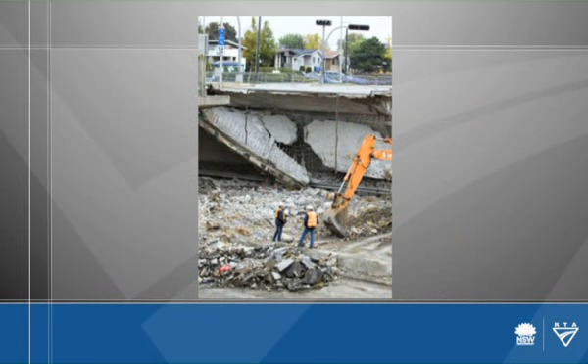Exactly. And in the whole process, say, of construction, if any one part of the process is not right, one of those can bring you unstuck in terms of durability and, as you say, even structural integrity. And we can certainly look at an example from Quebec, where due to a number of issues, including low-quality concrete, reinforcement placed in the wrong place, over a period of time this structure had an inbuilt deficiency which led to a complete catastrophic failure and in fact loss of life of people on the freeway below.

But it really highlights that any one part of the process can bring the thing unstuck. So everyone is responsible. Early on, all the way through, everyone's got to make sure they tie their laces properly. Exactly. So in this episode, we're looking at the 5 C's of concrete construction. Yes, Peter, a very important concept.

And there's a saying that says, good concrete is made from cement, fine and coarse aggregate and water, but sadly, so is bad concrete. The important thing is, it's the process that makes the difference. And talking of good concrete, it's all about achieving durability. Exactly. So these are the 5 C's. First, a quick overview, then we'll go into more detail.

Our first C, concrete mix design. In this subject, we're looking at testing materials, testing the concrete mix, so we get the concrete that we're after. Concrete production. That's related to the actual batching of the concrete, transporting it to the site, and getting it into the job. Okay, the third C is cover and content.

Yes, cover and content for reo and strand, because it's the cover that makes the difference. 5 mil of cover could add 15 years of life to the structure. So on to the fourth C, which is all about compaction, and this is to do with the pour, isn't it, Don? And I would probably say this is one of the most important aspects, compaction. So what we're after is getting the density of the concrete so we get a durable, strong concrete in the structure. On to the fifth C, which is curing.

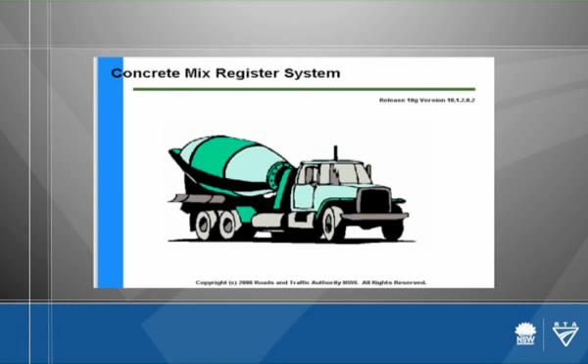So in detail now, our first C is concrete mix design. Don? Certainly very important. What would normally happen is that the RTA holds a register of all approved concrete mixes. So the contractor, if possible, will probably go for one of those. But if he doesn't, then he's going to have to go through the process of preparing a new trial mix, doing all the testing to make sure that it complies. And also he has to make sure that it's suitable for the application to which he's putting it.

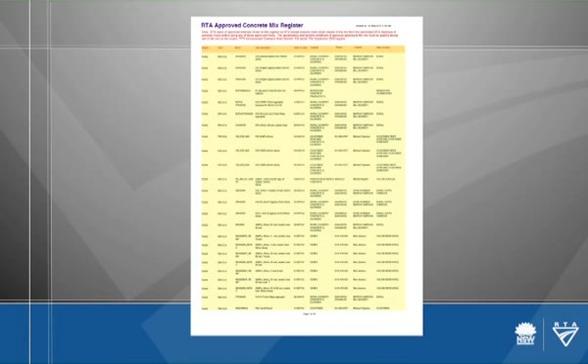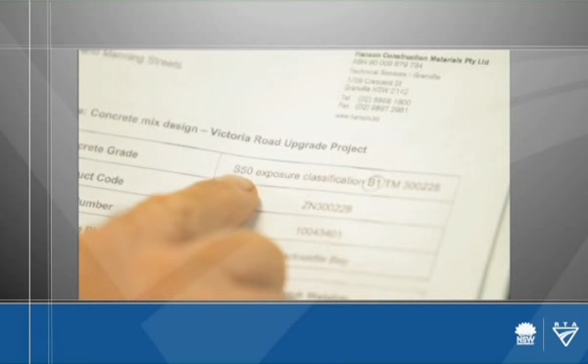Well, how do you make sure that it is suitable? Well, on the drawings, there's a classification given to tell the contractor what the exposure conditions of the bridge will be, and that will automatically funnel him into a particular type of mix design to suit those conditions. He'll also need to know what the water-cement ratio is in the concrete, what the 28-day strength is, how the concrete's going to be placed, whether it's going to be pumped, whether it's going to be put in with a kibble.

So all these need to be assessed, and how he's going to cure the concrete. So the water-cement ratio, this sounds important, Don. What is it? Absolutely. So what the water-cement ratio is doing is defining the ratio by mass of water to the cement in the concrete. And ideally for high-strength concrete, we want low water-cement ratio, because the lower the water-cement ratio, the higher the strength. And that's why, we'll talk about later, if you start adding water to the concrete, you're changing the water-cement ratio, you're reducing the strength and you're reducing the durability.

Now, Don, let me throw this at you. What if someone specified a mix, a ratio, that wasn't on the register? What would happen? If the contractor wants to use a mix that isn't on the register, he is then forced into going through the whole procedure of getting a trial mix approved, and that will involve testing the materials, all the cement, aggregates, etc., have to be all tested. He has to submit all this through a laboratory, but the thing that he has to allow for is that this process can take about 8 weeks for a new mix to be approved.

But in terms of water-cement ratio, you can only vary that by 3%. So again, the contractor will weigh this up and say, no, this mix isn't going to suit me, I'm going to go and prepare a new mix because of a number of factors. Now, the constituents of concrete can all have an impact on the final product. Let's go through some of the issues that can cause problems.

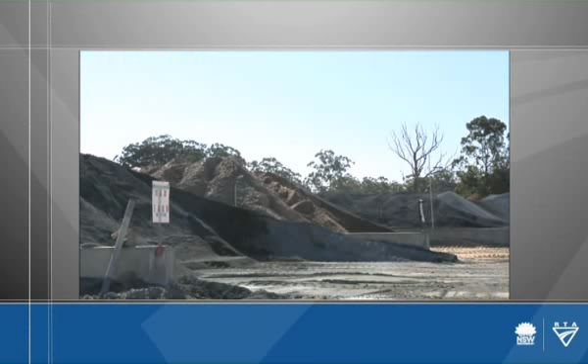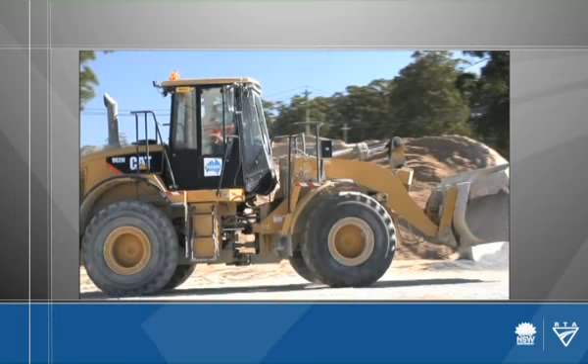Yes, Peter, and one in particular that's worth mentioning, I think, is manufactured sands. Because of the lack of availability of some fine aggregates, crushed rock is now being used as a fine aggregate. The only problem with that material is that it has the potential to absorb moisture. So what happens is the concrete can be batched, be on site, and then absorption will occur. The water will take up into the fine aggregate.

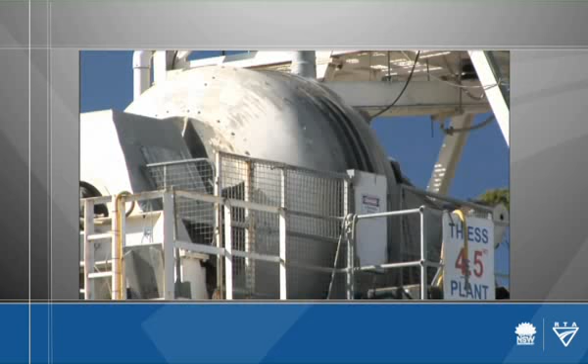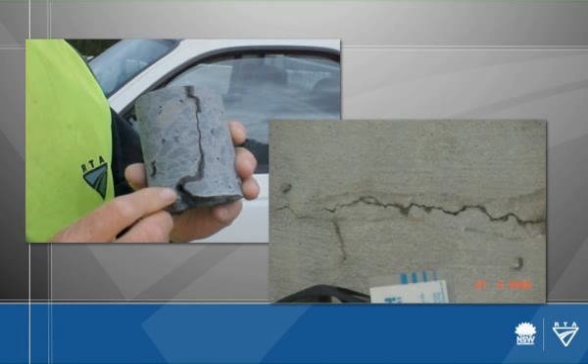The concrete will lose workability, become very difficult to compact. And what it led to, in some instances, very severe cracking of a deck where the deck had to be removed because of the problem. So the manufactured sands have to be controlled, but the specification now requires that the absorption of the fine aggregate can only be 2.5% of the water.

Now, Don, supplementary cementitious materials. That's a mouthful, isn't it? What we're talking about here are materials that are added as a supplement to the cement because we may want to control certain aspects of the concrete behaviour. So these supplementary cementitious materials will consist of fly ash, silica fume and other types of materials. The good part is that these are recycled materials, and so we're using a waste product for the benefit of the concrete as well as using it environmentally sound.

It's another language, isn't it, Don? It is, but you're doing well.

Now, AAR, Don, this sounds interesting. Yes, Peter, this is a situation that's arisen the last few years, and it refers to alkali aggregate reaction. And what happens is, as the concrete strengths have gone up, there's been a reaction between the silica in some aggregates and the alkali in the cement, and it produces a gel around the aggregate as it forms. And this gel is expansive.

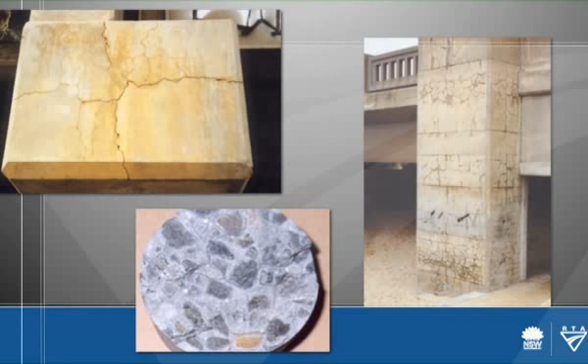So over a period of time, and it may be 30 years, this will slowly increase this gel and literally blow the concrete apart, and also will allow the ingress of aggressive agents like chlorides in salt water, etc. And that will further deteriorate the concrete. And if you look at this section here of the concrete, you can see there's a piece of aggregate there with a distinct line around it, and that's the formation of the gel that will eventually damage the concrete.

So to overcome the problem, all the aggregates now have been tested for reactivity to see whether they're susceptible to this problem. And so when a concrete mix is put together, they know whether they need to somehow address the problem. And that's where our supplementary cementitious materials come in, if I'm not mistaken. Yeah, and the actual material that's used is this material here, fly ash. And the beauty about the fly ash is that it's a recycled material, so there's a lot of it around.

It comes from power stations. It has to be tested for compliance with standards, but the beauty is that the addition of up to about 20% of the cement actually stops this AAR reaction occurring. And so we've gone from a problem with a material and we've corrected it with another material. So the fly ash is quite handy.

Very handy, and in fact, if the designer of the mix has asked for this material to go in, it is very important that it goes in, because the implications if this is left out is that in, say, 30 years, the concrete will start falling apart. Right. So it's ultra important. And the phone will start ringing.

Yes. Now, did the Romans know all this, Don? Because look, we've got the basic ingredients here of concrete. Well, actually, they did. They knew a lot about concrete, actually. And what we've got here is samples of the constituents of concrete. We've got the cement here that we use.

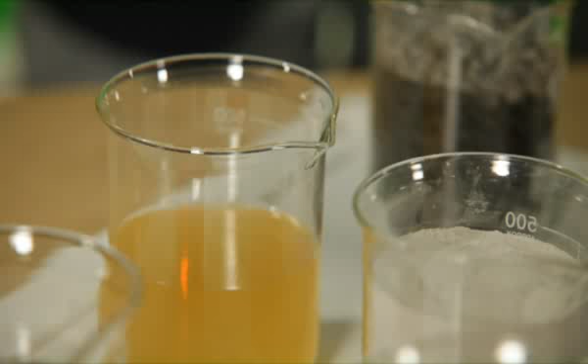Yes, Peter. So the first one we've got here, this is a super plasticizer, and this is a very handy material that we use in concrete. We talked about before, we want the low water cement ratio for strength and durability, and by using a super plasticizer, it makes the concrete very flowable, so you've got very flowable but very low water cement ratio.

But the problem is that you have to make sure you use this material before what we call reversion, where the concrete slump will go back to the very dry mix, so you have to make sure you work the concrete, compact it before this material reverts and you've got normal concrete again. So that's super plasticizer. That's super plasticizer.

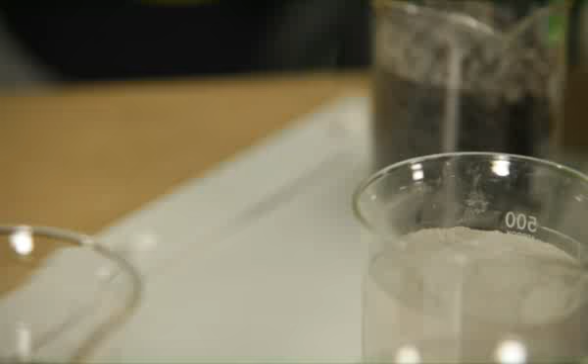And some claret. The other one we have here is a very good 1958 vintage,

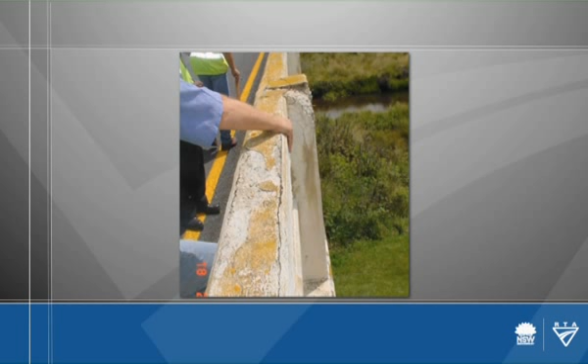So what happens is if the concrete is designed with an air entraining agent, the air entraining agent produces discrete bubbles of air through the concrete, and so you end up with very small pores, but it's very impermeable to water. So in freeze-thaw conditions, the water won't penetrate into the concrete, because if it does, when it freezes, it expands and will blow the concrete apart. So an air entraining agent in cold climates is a very important admixture.

So that's the super plasticizer and the air entraining agent, but there are other admixtures as well, aren't there? Yes, Peter, there are other admixtures that the designer of the trial mix may require, and that will be done to suit particular characteristics of the concrete. His options may include a water reducer of other types, it may be a shrinkage reducer, and there may also be corrosion inhibitors. But notwithstanding all that, the same situation applies, that if the admixture is being used, it's got to be tested, it's got to be dosed properly.

So the whole thing, again, we're coming back to this control part of it. So the mix that's used has to accurately reflect those admixture requirements that have been specified. And that's why the trial mix is so important. Absolutely. So I suppose the message here is to make sure that only approved mixes are used and that the components in those mixes are the same as the trial mix. Exactly. And then any of the admixtures or any additives to the product has to be approved as well.

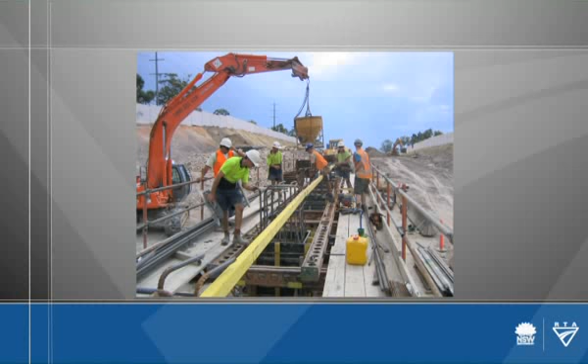And it may also be that the trial mix may have to be produced, say, for a column that's got a lot of congested reinforcing in it. You may have to go, say, to a finer aggregate because of the congestion, so that the concrete can get around the reinforcing steel.

So summing up our first C, concrete mix design: ensure that the trial mix is current approval, ensure that the proposed mix meets all the requirements of the design, and ensure that the components of the mix are as that tested in the trial mix, and that all materials used are tested for compliance or confirm that the approvals for their use are current, Don. And as we said previously, if you don't know, ask.

Now, the second of the 5 C's is concrete production, Don. Yes, Peter, and production is basically making sure that the correct mix is being used and the prescribed additives are being used as well, and basically it's controlling everything.

Now, moisture, critical. Absolutely. The batching plant has to have a very good handle on what the moisture content of their aggregates is, because the amount of water that's added to the mix will vary depending on the amount of water that's in their aggregate. So they have to test it and find out what the aggregate moisture content is, and then adjust the free water that they add.

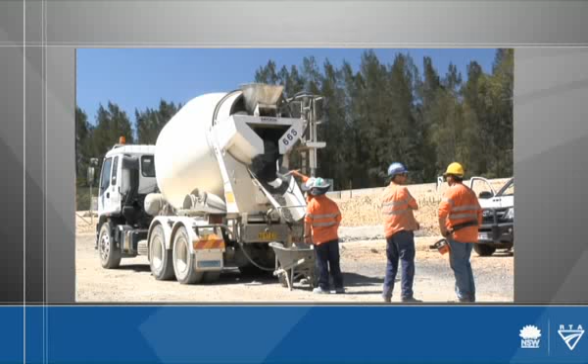So how do we monitor every aspect of this process, Don? Well, Peter, the on-site staff have got to do a test, which we call the slump test, which gives an indicator of the workability of the concrete, and also tells us if it's within the range that they're allowed. If the concrete arrives and the slump is way out of specification, then you might ask, is this the right mix at the right place? So there has to be some checking to make sure that you've got the right concrete.

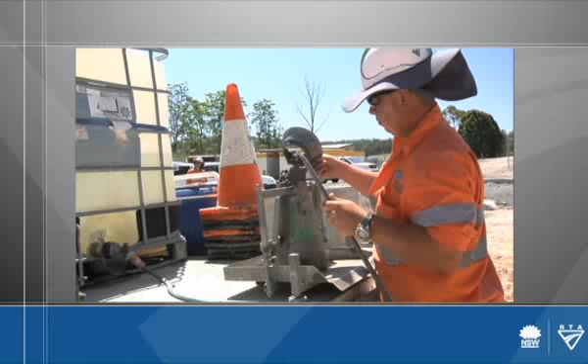Right. Are there any instances where this can accidentally arrive on site and it's out of range? Well, what can happen is a truck will arrive on site and the slump will be out of spec, and there have been known cases of people going around the block and adjusting the slump accordingly so that it comes back within spec.

No. But they do. Well, there's always someone to beat the system, I'd imagine.

But getting back to moisture, I believe you can add moisture on site if you need to. And how much can you add? Yes, you are allowed to add moisture. There are a few provisos on that. The first thing is that it has to be within 45 minutes since the cement was added at the batching plant. Yeah. It's got to be thoroughly remixed on site.

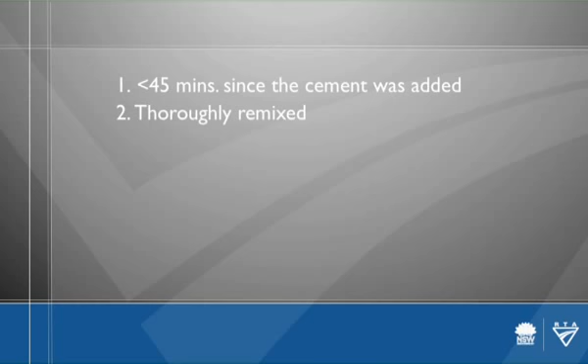And the water quantity is not to exceed 9 kilograms per cubic metre, and the water cement ratio is not to be exceeded. And the water quantity must be measured and recorded, and the slump still has to be within the range required, but no water can be added once the concrete truck starts discharging.

Now, the concrete's arrived on site, we assume it's all right, we've checked it, what happens now? So once the concrete arrives on site, I think we need to differentiate two things here: there's a difference between agitating and mixing. When the truck leaves the batching plant, the truck is spinning at an agitation rate. That's to stop segregation.

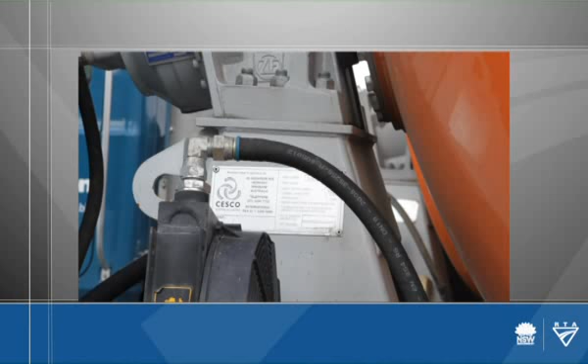But once it gets to the site, then you've got to mix it again. And you can see here on this photo, there's a plate on the truck that tells you what the mixing speed is and what the agitation speed is. And when you remix it, that has to be a minimum of 3 minutes.

How long does it take to become an engineer, Don? Not long. I don't believe you.

Okay, the third of our 5 C's is cover and content of reinforcing steel and of pre-stressing strand. Don. Yeah, and this is where we get to the stage where people really need to be hands-on, because what may look right isn't. And as we said, don't trust your eye or the paperwork.

So Don, tell me about ACRS. Peter, ACRS stands for the Australian Certification Authority for Reinforcing Steels, and it's a collaboration between government and industry whereby all testing is carried out on materials that come from overseas. The problem we have at the moment is we know where it comes from, but we don't know that it complies with our requirements. So what ACRS do is provide a certification for all these materials. So if you're on site, you need to have a certificate to say that it complies. Yep.

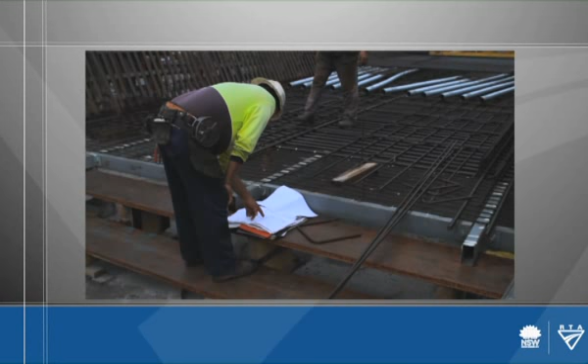And in addition, your responsibility on the site is to make sure that the number, location, and lap lengths of the bars all comply with the requirements shown on the drawings. Sure. All these matters need to be checked and marked off on either the drawings or a suitable checklist. That's like our friend's doing here.

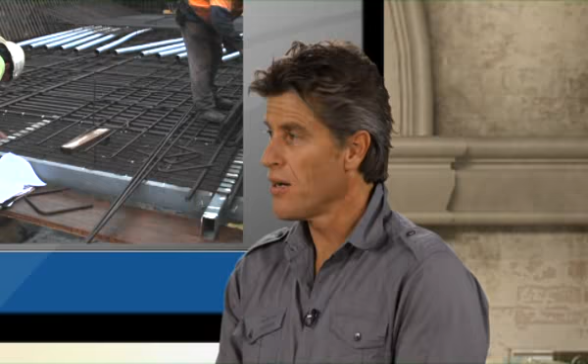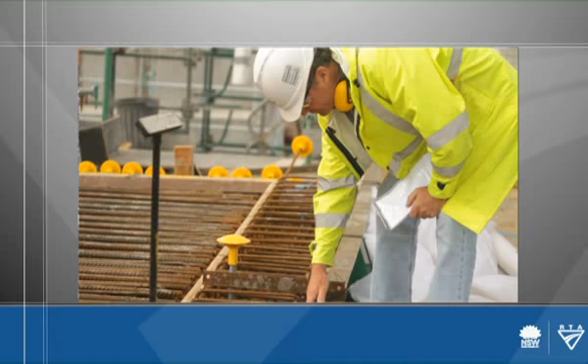What are the other things you need to consider when you're inspecting the site? Be very careful of the cursory glance. If you go and do an inspection without the specific aim of what you're going to look for, the chances are you won't see anything. I see. What are they checking here, Don? They're checking the pre-stressing ducts are in the right location and securely tied to the reinforcement. Also, enough bar chairs need to be there to support the reinforcement, and the reinforcement strong enough to support the concrete workers and their gear.

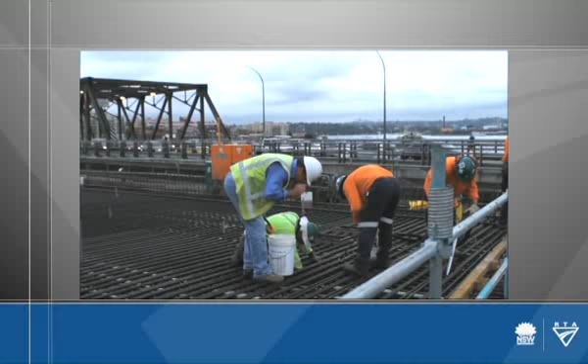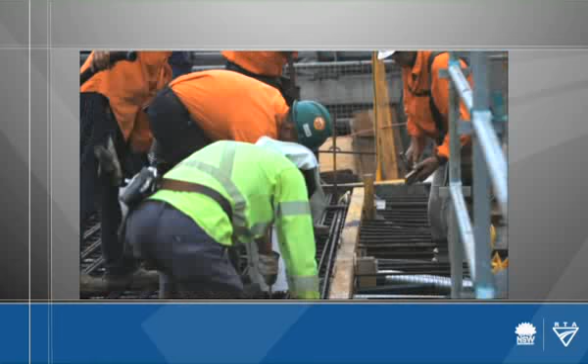Every time you turn up, you would assume that the site's clean, but that's not always the case, Don. No, certainly not, Peter, because in the process of doing the construction, there's going to be accumulated rubbish, which may be blown in, or it may be bits of tie wire, there may be bits of timber. And so what you've got to do is make sure that the formwork is clean so that the concrete is not contaminated by rubbish.

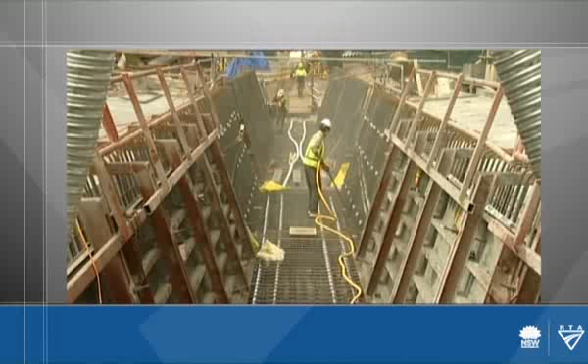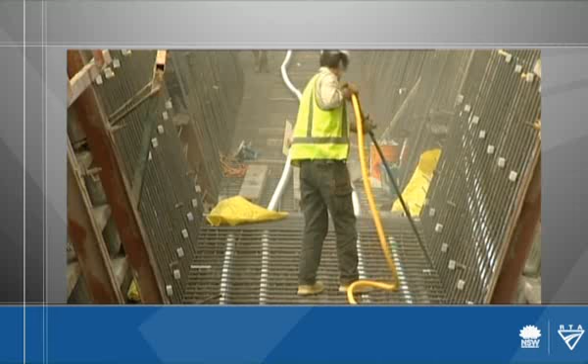So we've done everything. We've got the concrete there, we've checked it, we've made sure it's okay, we've got the formwork in, we've got the bars in. Are we ready to pour? Not quite, because there are some instances, say in a marine environment, where salt will be deposited on the reinforcing steel while it's being built up in the cage. So that needs to be washed down to remove all the salt. There may be overspray from curing compound in an adjacent area. There may be other contaminants. So it needs to be cleaned down. So much to think about, Don, before we start pouring, isn't there?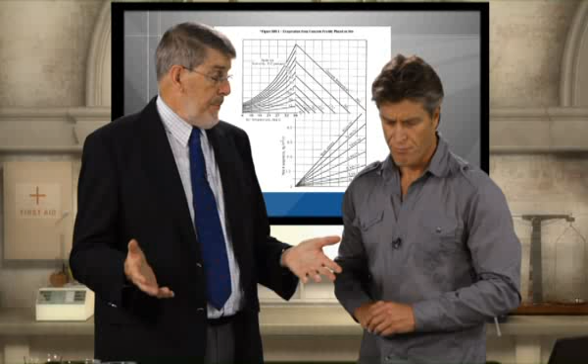Exactly. Now, I'd imagine atmospheric conditions are important. Certainly very important. Whether you pour or not, you have to take into consideration what the atmospheric conditions are going to be on the day of the pour. And this can be due to wind, humidity, you may be getting rain. But in the B80 specification, you can see this diagram here, which gives a relationship between humidity and wind speed, and so it can tell you the evaporation rate, and the specification will say the evaporation rate must be less than a certain threshold, so you have to check your conditions to make sure it complies.

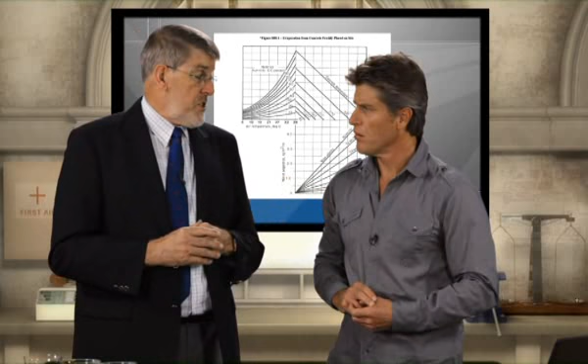And again, with these forecasts, this is all to do with your forward planning, I'd imagine, as well. Exactly, and it may be, say, in adverse conditions in hot weather, you may want to start the pour very early in the morning, in the coolest part of the day, or if the conditions are extreme, you may have to defer the pour till better conditions are available. So it's really being flexible about your pour and taking into account the weather conditions that are going to occur.

Now, Don, what about blinding slabs? Well, a blinding slab is simply a concrete slab that's put down before a member is poured as a support system for the reinforcing cage, the formwork, etc. So you've got a nice level working base to put your formwork on and control everything. So it's got to be strong enough to support all that weight that's going to sit on it.

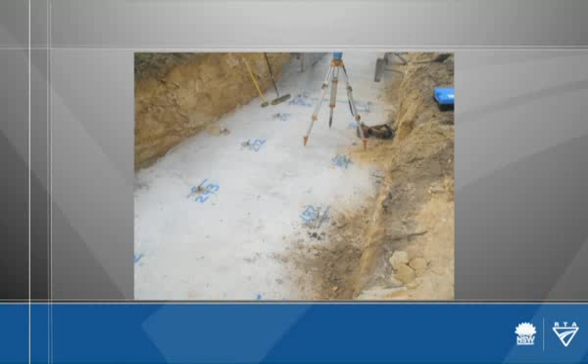Now, the other issue you have to make sure of is when you pour the final concrete on top, the blinding slab has to be saturated. Otherwise, there's a problem that the blinding slab will suck moisture out of your new concrete. So you have to saturate that surface where there's an interface between the two. So summing up the third C, concrete production: everything planned, everything to design, everything to the specification, everything checked before the pour.

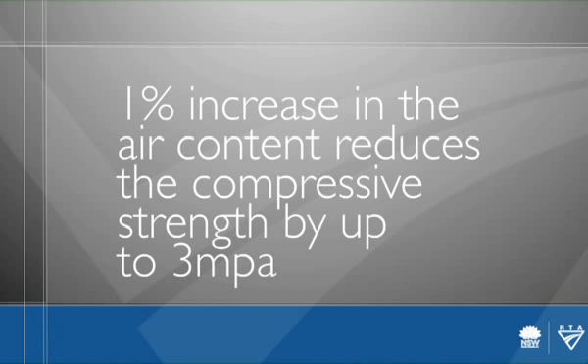So on to the fourth C, which is all about compaction, and my understanding is the concrete mixes in, we've started to get the vibration happening, but I'm sure there's more to it. There certainly is, Peter. And in fact, you could say compaction is a very important part of the process, because what we're doing is placing concrete from the truck that's got air in it, and what we're trying to do with the compaction is to get that air out of the concrete. And in fact, a 1% increase in air content reduces the compressive strength by up to about 3 MPa. Makes a difference, so it is significant.

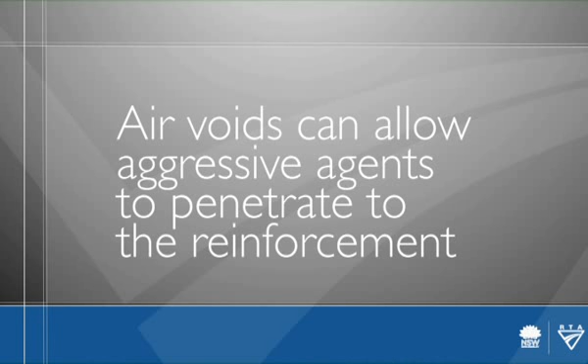So the other issue is that if there's air voids left in the concrete, then that's a pathway for aggressive agents to get into the concrete and to the reinforcement. So again, we're talking about durability. So that's the importance of compaction. How do we actually achieve it though, Don? Well, really we need a systematic approach. You can imagine if you've got a large surface area that you're trying to compact the concrete, you have to remember that the vibrator has only an effective radius of about 250 millimetres. So if it's not done systematically, it's very easy to miss an area of that concrete, and so you'll have concrete with air voids in it.

So I imagine the key tool here is the vibrator. Well, no, it's not actually. It's really the operator, because the operator holds the key. He's the man holding the vibrator. And what the RTA has done in recognition of this is introduced what they call the grey card, where the people that are going to do the compaction have to be trained to do that task.

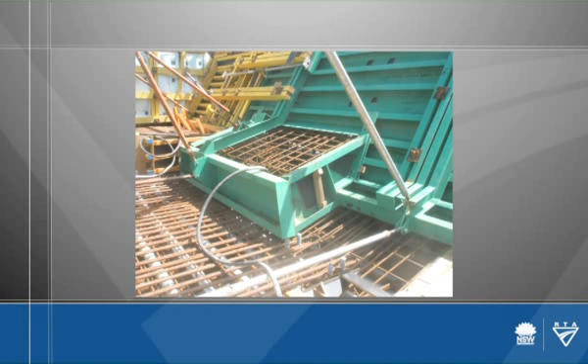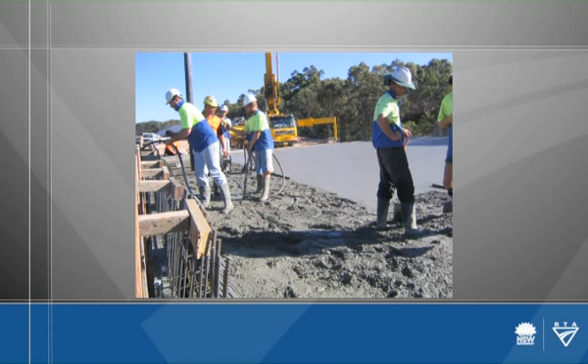Now, us architects like to design all sorts of crazy things. How do you get the vibrator in and around those type of structures? Well, certainly there's going to be some areas that are going to be difficult to get to, and it may require what we call a window in the formwork, where there's actually like a door, if you like, where the vibrator can be inserted into a difficult area, or it may need a small diameter vibrator. Conventionally, the vibrator is a 50 millimetre diameter, but you may need to go down to the smaller pencil vibrator to get into those congested areas.

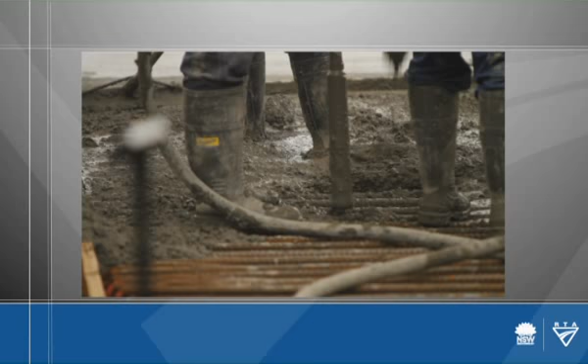Now, in terms of a bridge deck, you can imagine if it's a very large area, you'll have more than one vibrator operating. So you've got a number of vibrators and obviously the operator. So this is where the complexity starts to come in, because how do you then control who's doing what? That area has been done, this area has been done, have you done that? So this is where things can go horribly wrong, and there's certainly been examples where due to a lack of compaction we've had problems with the decks.

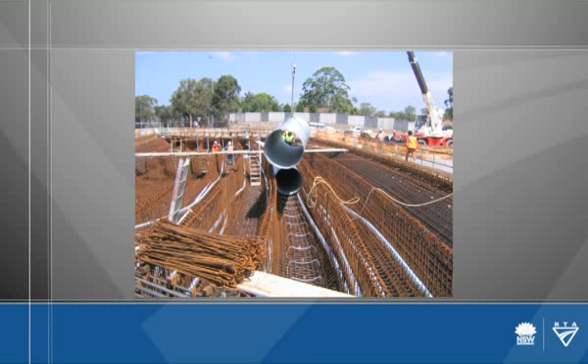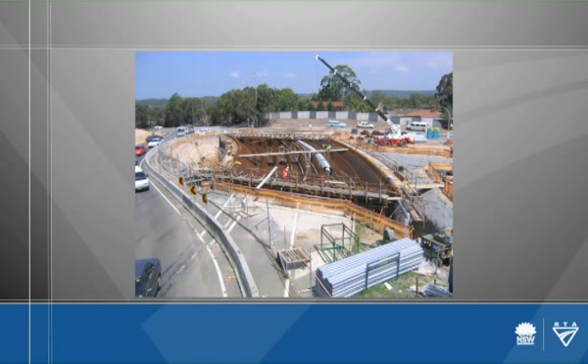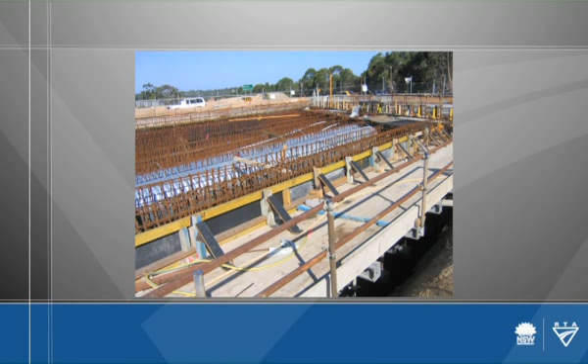The other issue that comes up is in some members we use what we call a void former, and there's a real risk here. You can imagine if you've got a large circular void, there's a real danger of air being trapped underneath that void former. So when it comes to this sort of construction, it has to be done very carefully, and we've got examples where there's been large areas of void because the concrete never got under the void. We don't want that. Exactly. And again, if it's an area that needs it, you may need to go to a smaller aggregate size. But of course, as we've said before, if we go to a smaller aggregate size, then we've got to go to another trial mix, if an approved one doesn't exist.

Now, Don, I'd imagine at the time of the pour, that's not the time to be introducing that. Exactly. And that comes down to planning our process, doesn't it? And you have to also plan for the failure of vibrators. Certainly, and that's what planning's about, isn't it? So what the specification says is you must have one vibrator for every 10 cubic metres of concrete, and you've got to have one spare for every 4 vibrators. But also you must always use a minimum of 2 vibrators, irrespective of the size of the pour.

In terms of immersion time, it's just not enough to have the vibrators there to wait for the concrete to be level. That's not compaction. That's not good enough. Certainly not, Peter. And compaction is in fact a 2-stage process. The first stage is where the immersion vibrator goes in, the concrete flows as a fluid, and the second stage is when the concrete starts to compact, the air starts to come out of the concrete, and so now we're into the proper stage of getting what we want.

You have to have the thing placed in vertically too, don't you? Absolutely. So the concrete can only be best compacted if the vibrator is inserted vertically and then withdrawn slowly. Now, a good operator will know that when the vibrator goes in initially, there'll be a change in pitch, and then as the concrete is consolidated, that pitch will rise as the density of the concrete increases.

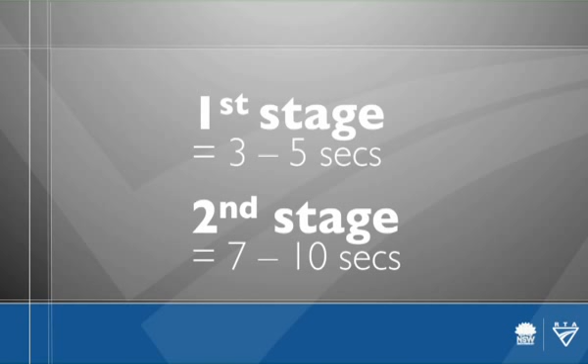What about the times too? Because it's that fine a detailing in terms of how long you need the thing in there for. So the initial stage where we talked about it becoming a liquid is about 3 to 5 seconds. The second stage where we're actually compacting it and getting the air out of it, normally about 7 to 10 seconds. Wow, plenty to think about. I can understand why you need to be fully qualified for this role.

Exactly. And the other thing, people have also the thought that segregation may be a problem, so that you could over-vibrate. But generally, the modern mixes that we have today, segregation is not a problem. Our biggest problem is usually to do with under-compaction, not over-vibration. And we have some examples here of what can happen when that attention has been missed.

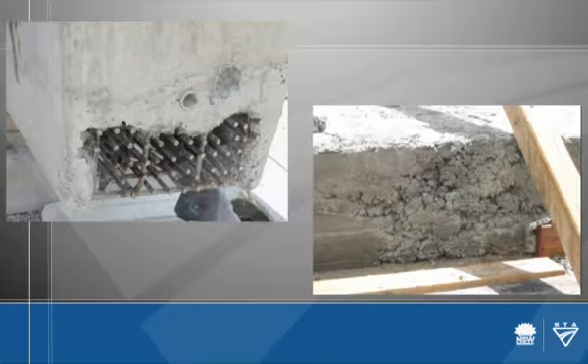I know every aspect of the process is important, but it seems to me that compaction is the process that is potentially more prone to oversight. Absolutely, Peter. And in fact, a very learned engineer, Dr. Neville, made a statement, and I quote, "In engineering practice, the strength of concrete comes down to 2 primary factors, water-cement ratio and compaction." So to summarise the 4th C, compaction, plan the pour and compaction process, ensure concreters have green cards, and supervise the workers to compact all areas.

Now, the final C in our 5 Cs of concrete construction is curing. Now, there's a difference between drying and curing. Those terms aren't interchangeable, are they, Don? Absolutely, Peter. So for hydration to occur in the concrete, moisture must be present. So if the concrete dries out, that hydration process will stop. And the chemical reaction that we require to continue to give us the strength and the durability has now stopped. And so what we're really saying is that curing allows for all the cement in the concrete to hydrate.

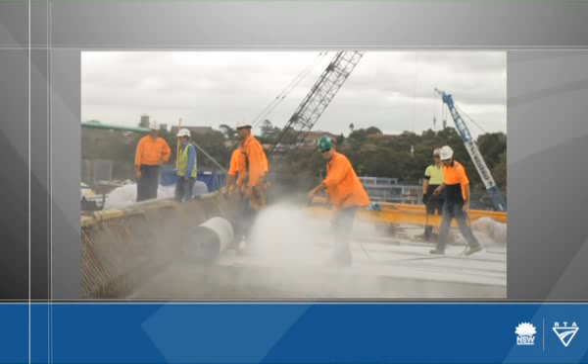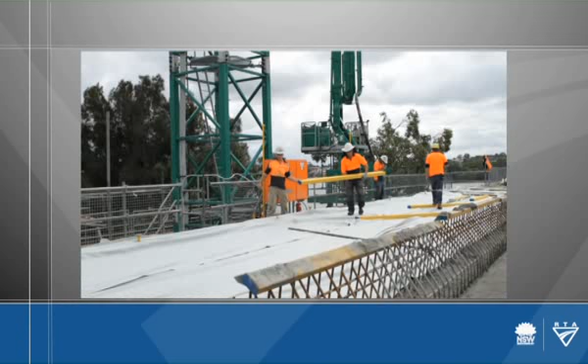And hydration, Don, in this sense, isn't about getting a drink. Certainly not. It's to do with giving the concrete sufficient water for the hydration process to go to its full extent, to ensure the concrete we end up with has the strength and the durability for the purpose that we need it for. Curing allows all the cement to be hydrated. If we withdraw the water away from it by drying, the hydration process stops and we've got cement in the concrete that's unhydrated. And here we're not talking in terms of hours, are we?

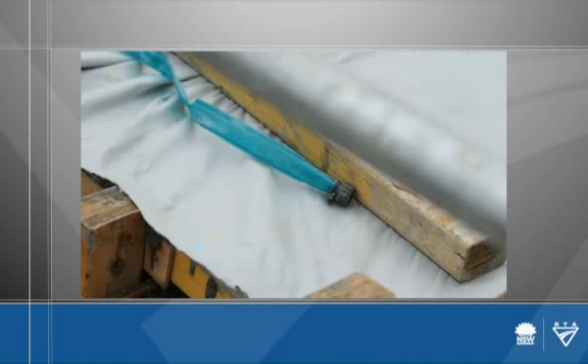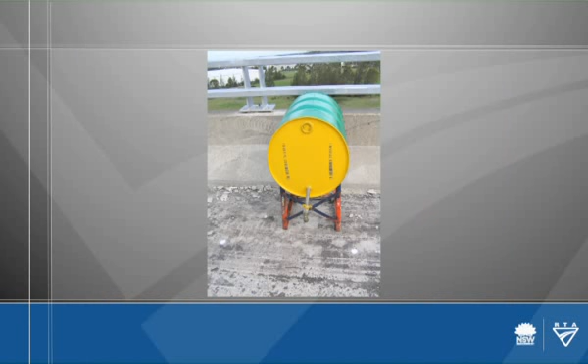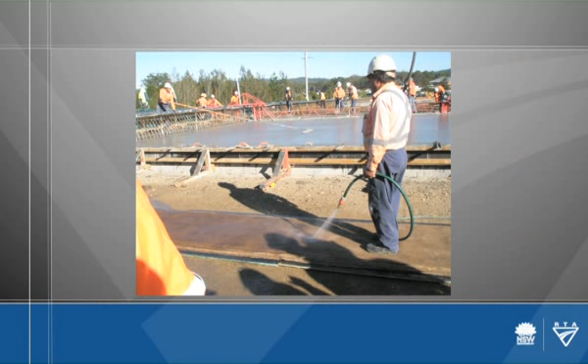Exactly. So the curing has to be covered by 2 constraints, sufficient moisture and sufficient time. The specification says in the order of 7 to 21 days, depending on the conditions and the concrete that you've got. Now, curing compounds, I know, are commonly used, but are they all they're cracked up to be? Certainly not, but they are used in certain applications. We use them on the basis that we know they're not as effective as water curing, but in certain applications that is the best alternative. However, in the case of a bridge deck, where we've got such a big area, it's a requirement that the bridge deck be cured with moisture and not with the curing compounds.

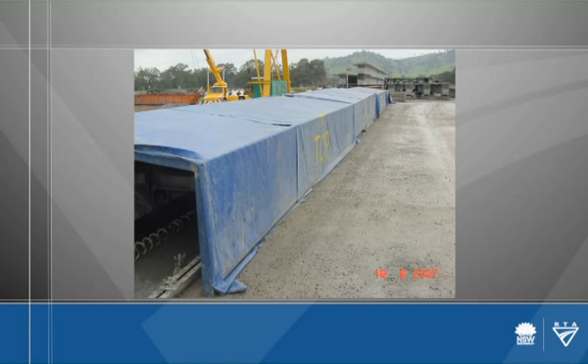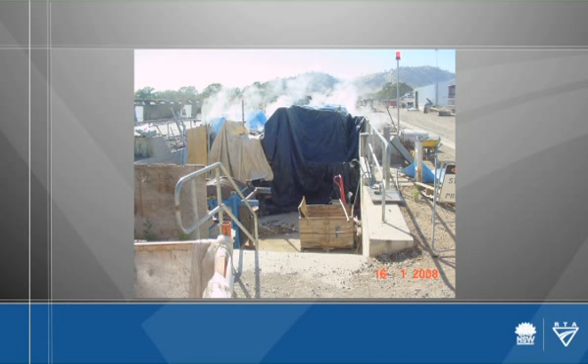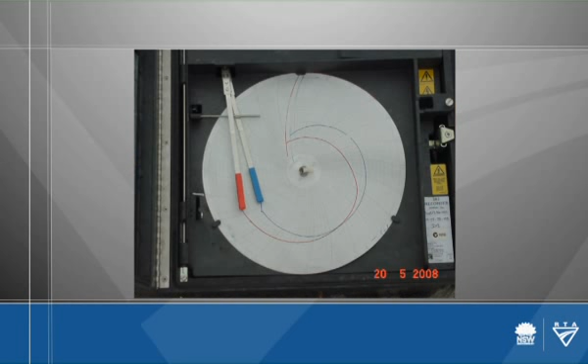So steam curing, tell us about steam curing. Steam curing is used in the precast industry particularly. The advantage of steam curing is that it accelerates the curing process to 24 hours or less. The process is having the member covered and then filling that enclosure with saturated steam, and the temperature is uniform through the member. It also requires, as we've said before, process control. So the temperature has to be controlled, the rate of rise of the temperature has to be controlled, and the maximum temperature has to be controlled. It's very critical that these constraints are controlled because steam can actually damage concrete.

So that brings us to the end of the 5 Cs, but what happens when we don't follow the 5 Cs? Cracking. Certainly, Peter, and that's what we're all trying to avoid.

Basically, most concrete cracks, I think we should make that clear, but what we're talking about is cracks that are of greater width than 0.1 millimetres. What happens though when the crack is bigger than that? That becomes an issue. Certainly, when it gets to beyond that size, then we are faced with a problem that aggressive agents could get into the concrete. So the process is that we want to avoid the cracking occurring in the first place.

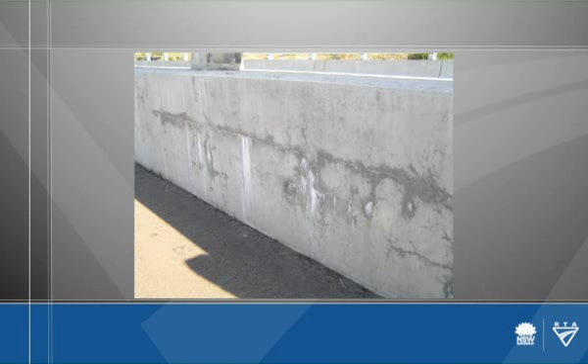So during concreting, what sort of cracking can occur then? In the early stages of concreting, while the concrete is in the plastic state, we get phenomena called plastic cracking. Now, this cracking is not a problem as long as it's noticed because they can be worked on and closed up. So that's during concreting. What about during the curing process, Don? What sort of cracking can occur then?

If the concrete is dried out, then we get a phenomenon called shrinkage cracking because there's a volumetric change in the concrete as it dries out, and the concrete doesn't have sufficient strength to resist it, so it cracks. And in that case, the cracking has to be repaired. There's no way that you can restore it. Okay. Is there any other sort of cracking that we need to be worried about? I'm sure there is. Well, certainly two other forms.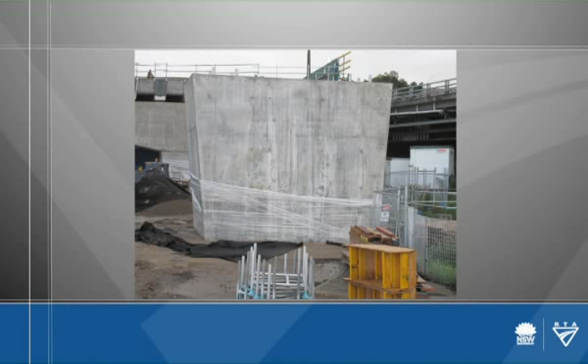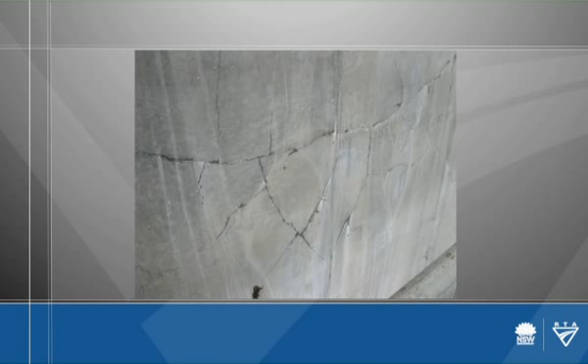The first one is thermal cracking. So if concrete in a very immature stage is subjected to changes in temperature, resulting in a contraction or expansion, the concrete doesn't have enough strength to resist that, and so it will crack. And we call that thermal cracking. Okay, so that's thermal cracking. You also mentioned slump cracking.

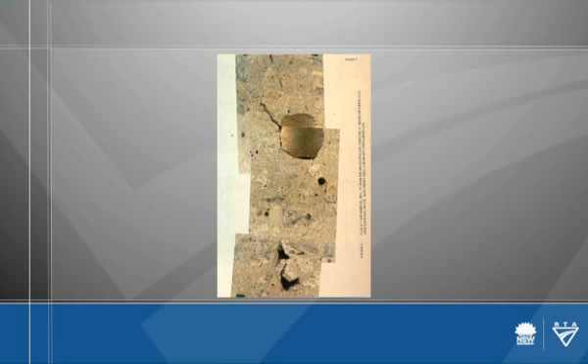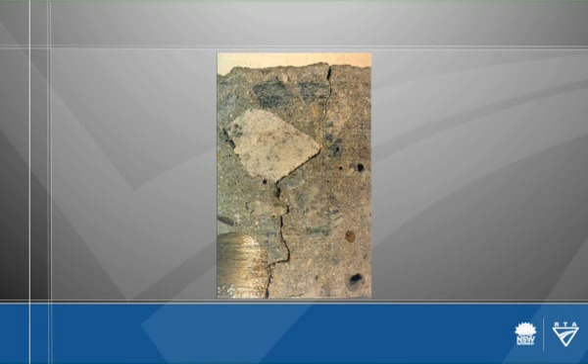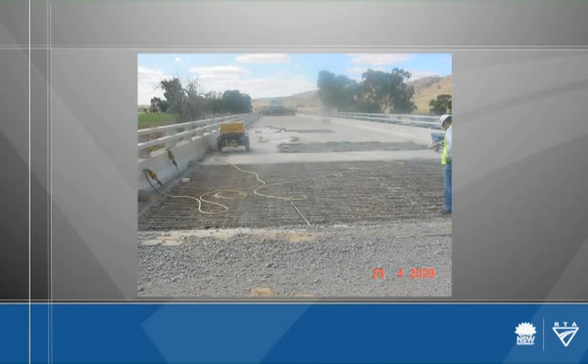Right. Slump cracking occurs when the compaction is inadequate in the concrete. So as a result, the concrete sitting over the reinforcing is hung up where the rest of the concrete consolidates down, and you end up with a crack that follows the line of the reinforcing. And if that happens, you'll find that it may be right through the deck, and the implications may be that the deck will have to be abandoned. Wow, so that really goes to show how important it is to address the issue of getting the correct slump at the start. And compacting the concrete properly.

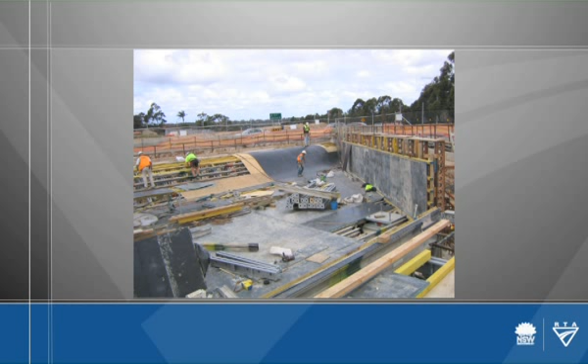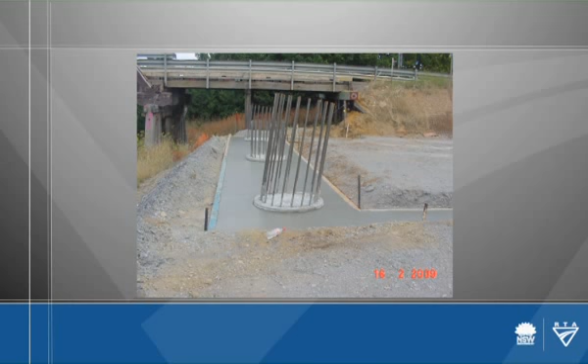What about the formwork? I'd imagine that has a very important impact on the process. Certainly the formwork has to be designed to take all the pressures and forces that it's going to be subjected to. We don't want the formwork to be going out of shape, and we don't want the formwork to be leaking slurry, and we do that by having good joints in the formwork. The formwork needs to be rigid so we don't get deflections, and that way you can control the line and position of the formwork. So when you're removing the formwork, you need to take care not to damage the surface, and if people start using tools that are going to abrade the surface, it's going to spoil the off-form finish.

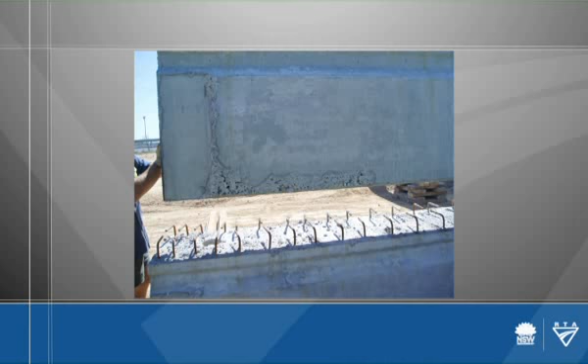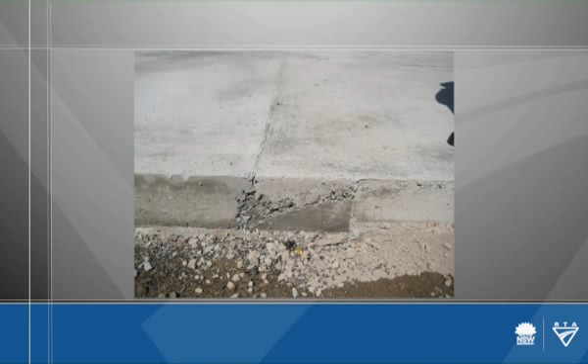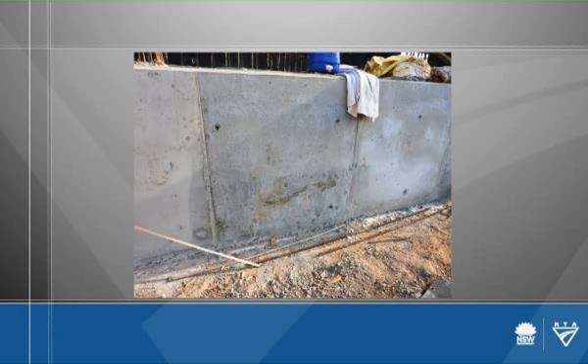So Don, are there any other avoidable defects we need to be aware of? Well, other avoidable defects include honeycomb, which may be caused by lack of compaction, but it also may be caused by slurry loss from the formwork. So in other words, the formwork hasn't been sealed properly. You may have cold joints in the concrete where there's been a delay and the two layers have not been integrated, so we end up with a line in the concrete surface. You may have burn marks on the formwork as a result of someone touching the form with a vibrator. And you may have foreign materials that have got into the formwork that haven't been cleaned out when they should have been before the pour.

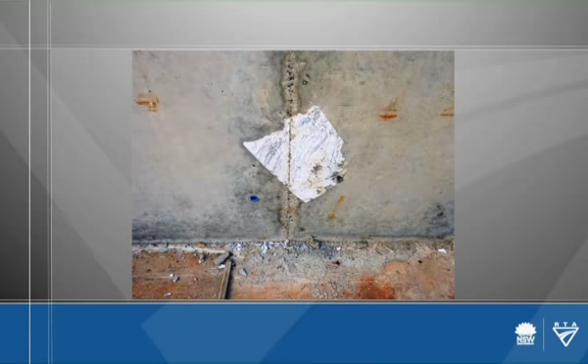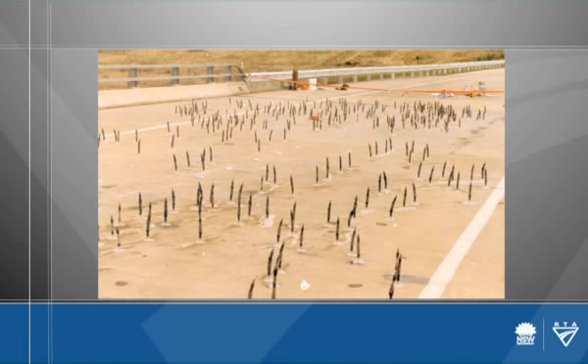Well, what about repairs? Well, ideally, we don't want to repair concrete at all. Yeah. But if repairs are required, then the method has to be approved. The materials have to be approved, and in fact there may need to be a trial patch somewhere else just to see that the method they're going to use is appropriate. And you're going to try to match the colour, obviously, for aesthetic reasons.

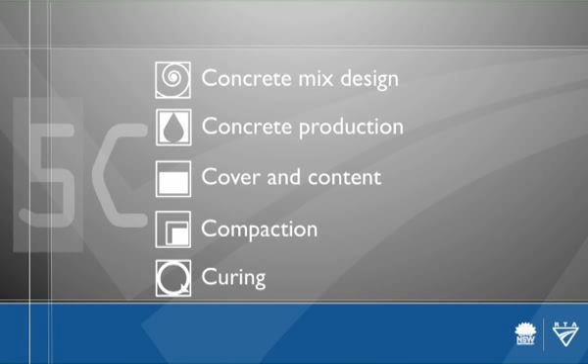So, Don, what is it about the civil construction industry that makes it unique? Well, what we're on about is building structures that are going to be durable and around a long time after we've left, and that's the way we need to approach it.